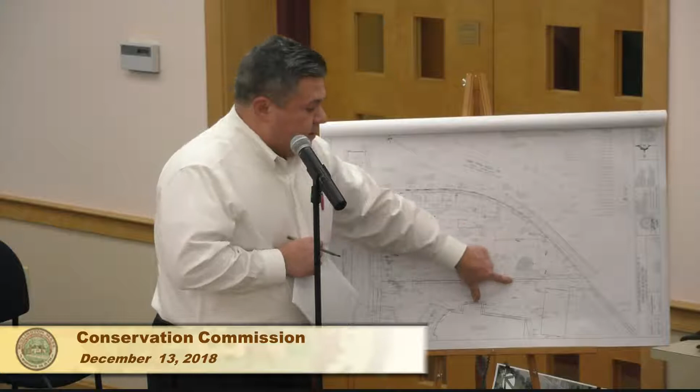I understand you were able to visit the site yesterday, and I'm sure you saw all the cars on the property. One change to the plan that we noted during our survey is that there used to be a building where I've drawn the orange square, and now it's a gravel area. It was thought at the time that they could continue to use that building, but I guess for whatever reason, the way it was explained to me, they couldn't use it for its intended purpose, so it was taken down and it remains a gravel pad.

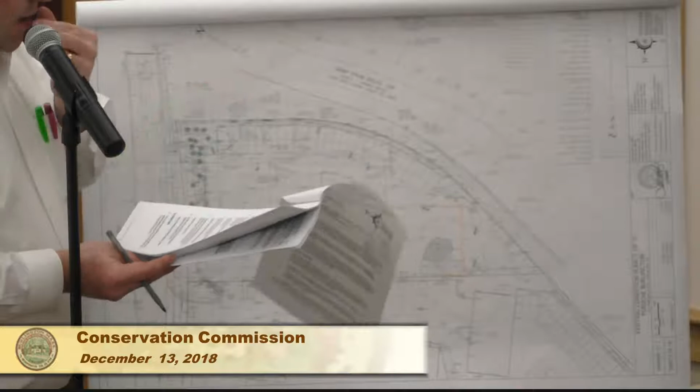In addition, we went through every item, every condition in the permit, and spoke to each one. So our letter is rather long because we went through every single condition. For the most part, everything went right along, but I want to bring your attention to a few pages - let me count them: 2, 3, 4, 5, on page 6.

Special condition number 45. During construction, there was an oil water separator and stone cuttings collection pit that they encountered as they were dismantling the former building. It was thought best to have the LSP of record out to the site to make sure there were no reportable concentrations of any contaminants. Those areas were tested, and a report summarizing the work was prepared and submitted to Christine Mathis at the Board of Health back in 2015. But none of this activity occurred within the jurisdiction of the commission. The important thing is that no contaminants were found as they removed these objects. It was just a bit of a surprise, so I wanted to point that out to the commission as we went through our review.

The next part of the special conditions I wanted to draw your attention to is right at the very end, where there's an extensive discussion in the order of conditions - this is special condition number 57 - that talks about no certificate of compliance being issued until the following items are submitted: the written narrative, the as-built plans, and an operation and maintenance compliance statement.

One of the last paragraphs in our letter, I'm just going to read aloud here. This letter, the one we prepared that accompanies the COC, is our written narrative providing compliance with condition number 57. As-built plans prepared under the direction of a professional land surveyor and professional engineer accompany this request. The owner has indicated to us that the parking lots on 62 and 64 Cambridge Street are swept with a street sweeping machine each spring - I'll follow up on that in a minute. They have also indicated catch basins have not been cleaned because of the regular street sweeping program. The responsible party for ongoing operation and maintenance of the stormwater structures on 62 and 64 Cambridge Street is Herb Chambers Companies. We also attached a couple of aerial photographs that date back to prior construction and post-construction.

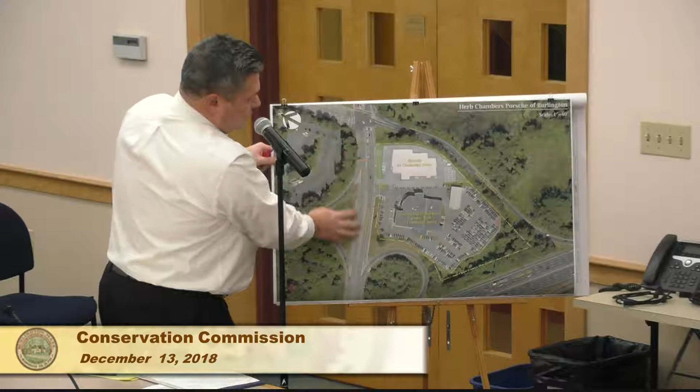I'll zoom in a little bit and drop this down on the floor in a minute. But back up a little - I'm sure you're all familiar with the location of the site here. North is this way on the plan. Here's Burlington Mall Road, and over to the west is Cambridge Street, Route 3A, and this is the ramp that comes down from 128 at the Mall Road access.

64 Cambridge Street is about 1.5 acres of land, and as you know, it contains quite a bit of impervious surface in the existing condition, mostly paved. The reason we're here is because we have some minor activity in the buffer zone to a bordering vegetative wetland.

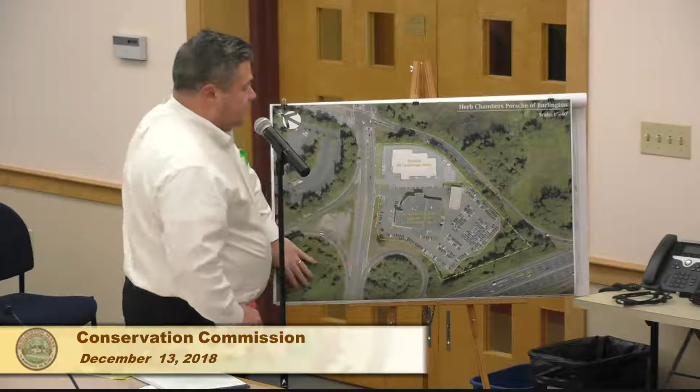There are a couple of wetland resource areas that we reflagged - the same ones identified on the previous filing for the car storage facility. To the north, on the other side of the ramp, is the primary BVW, part of a larger system. This property happens to be tucked away in the northwest corner of a Zone A to a public water supply in the town of Woburn.

This wetland, even though it's a wetland, is very high in the watershed. Eventually these waters flow through 64 and 62, along Cambridge Street - I chased it down to give you folks an idea of where this goes. It eventually enters Little Brook, then Cummings Brook, and eventually into Woburn, into Horn Pond. That's about 2 miles away from us.

The buffer zone from the bordering vegetative wetland comes onto the site into the parking lot area a little bit, so our closest activity is about 85 feet from that BVW. Across the street on Cambridge Street there's also a small BVW, but its buffer zone falls just short of the property, so there's no activity within 100 feet of the wetland from across the street.

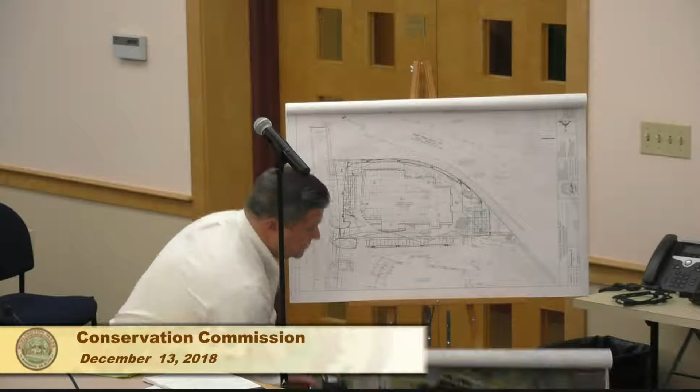Generally, I'll describe some of the basic elements of the project. In terms of impervious surfaces, about 83% of the property is paved today. What we're proposing is taking up that paved surface and replacing it with another impervious surface, but it'll be roof area - a reduction of about 13,600 square feet of pavement, something to keep in mind as we go through the plan.

Overall, it's actually a 13,600 square foot reduction in pavement, but overall we have an increase in impervious surface of about 11,400 square feet - a lot more roof area than pavement. Even though this is being redeveloped, we're not asking for redevelopment credit. When I get into the stormwater management standards discussion, we're considering this new construction, full compliance with DEP stormwater management standards.

Where is most of that increase in impervious coming from - is that from the gravel section being paved? Otherwise it's all just roof and pavement. We were conservative in those representations - I did break that out as well. That gravel area, for example, is just over 8,000 square feet, so it's just about a 3,200 square foot increase in hardscape, but we included that gravel area as impervious because if you recall, in the previous plan it had a building on it back at that time. There's also another curb cut and stuff, which is additional impervious.

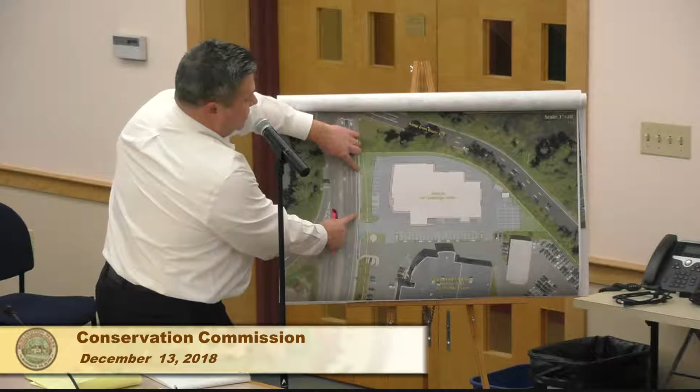You may recall that in the existing condition, prior to the car storage facility, this had another commercial/industrial use with 2 curb cuts onto Cambridge Street, and they made us close both of them because this parking lot was going to work in concert with the dealership, as it does today. At the time, the owner reserved the right to come back to the town and reopen a curb cut in the future if that property was going to be a standalone property. So here we are today, and our proposal is to reopen this curb cut onto Cambridge Street at this location.

In terms of general flow, we have two-way traffic around the entire building, and you can see how the parking is laid out on the project.

This building, in addition to having a large floor area for customers, also has a lower level garage space for inventory vehicles, with space for 85 inventory vehicles. I'll go into a little bit about where the groundwater is in relationship to those floors in just a minute.

For the remainder of my presentation, we're going to be referring to the topographic plan and our utility plan that has most of the drainage information. This is our topographic plan of the property. Just to give you an idea, in the existing condition, which you saw for yourselves out there yesterday, the site has a slope to it.

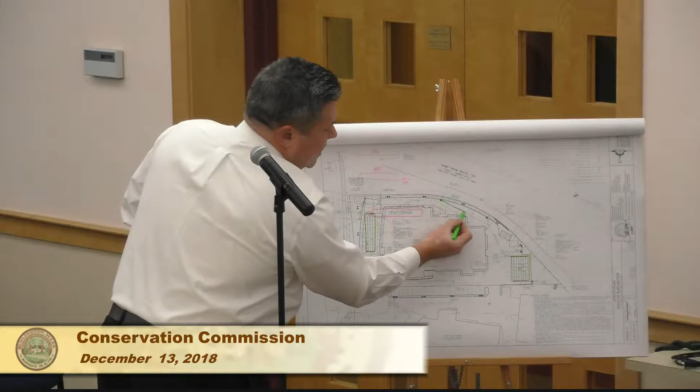So the way the stormwater system works, it's not quite split in half, but let me use two different colors to show you that for our infiltration area number 2, we have deep sump catch basins that collect surface water runoff from this portion of the site, heading back in this direction. They connect to a drain manhole and then to our sediment separation device, which we're going to be reusing, and then to another discharge manhole before entering the subsurface chambers.

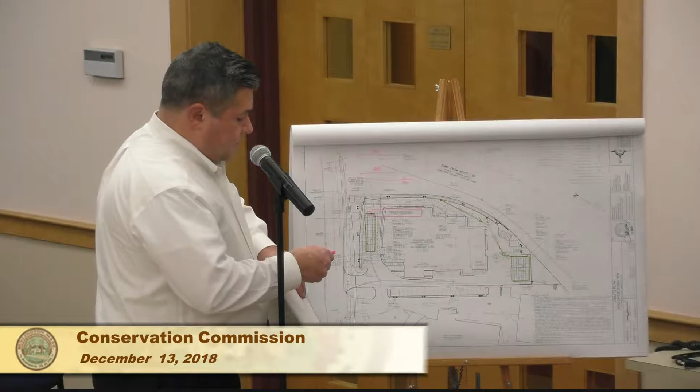What I didn't tell the ConCom is that we just had our hearing number 3 with the planning board on this project last week, and leading up to that meeting, after we had already filed with the Conservation Commission, there were some minor revisions to our landscaping primarily. After we met with John and Eileen, John made a recommendation to us regarding how we're connecting our roof runoff to the infiltration system.

We had designed the system, and we go back—we work in a lot of different towns, and there are some towns and some reviewing engineers that like us to run our roof runoff through the sediment separation device, and some folks that just say run it directly to the infiltration device because it's considered clean.

Right, so good, we separated it, and a portion of the roof, if you will, comes out here and enters that final manhole after the separation device now. You haven't seen that small change yet, but we'll be sure to submit the revised plans.

On the other side of the site, we have our infiltration area number 1. Again, we have a series of deep sump catch basins that run to a series of manholes. There's a small trench drain here to make sure we're capturing the water coming off in this direction. It's a very similar setup, a series of drain manholes leading to the separation device, then to the final manhole, and then the rest of the roof discharging to the manhole and then to the infiltration device.

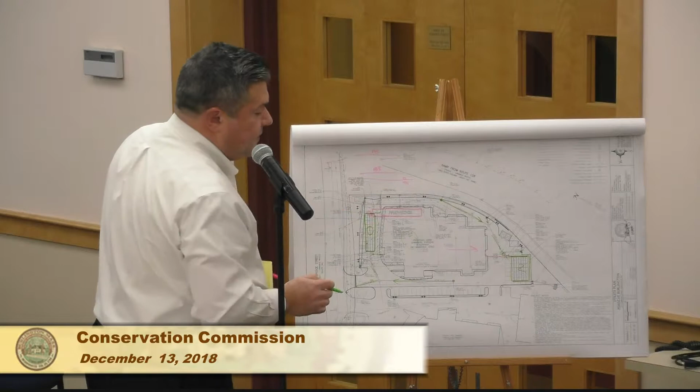So we have an overflow structure that comes out of this infiltration area, number 1, through the retaining wall. And then for the other one across the site, we're proposing a level spreader in the back here to control any water that were to come out of that device.

I'll go into how we were able to mitigate both volume and peak flow in a minute, but going through the standards, we have no new outfalls without control. That one is a new outfall, but we're controlling it with a level spreader, and we've designed the size of the riprap based on the velocity of the water coming out in the design storms appropriate for sizing that riprap.

In terms of peak runoff, if you look at our summary tables in the beginning of our stormwater report, we have slight reductions. We try to get it as close to net change zero as we can for each of the design storms. We were also able to mitigate the volume as well through the use of our two infiltration chambers, all the way through the 100-year storm event.

For groundwater recharge, our test hole program determined that we have sandy loams, which is hydrologic soil group B, which is— Excuse me, did you just say you're mitigating volume in addition to peak? You're mitigating the volume in addition to the peak flow? That's correct.

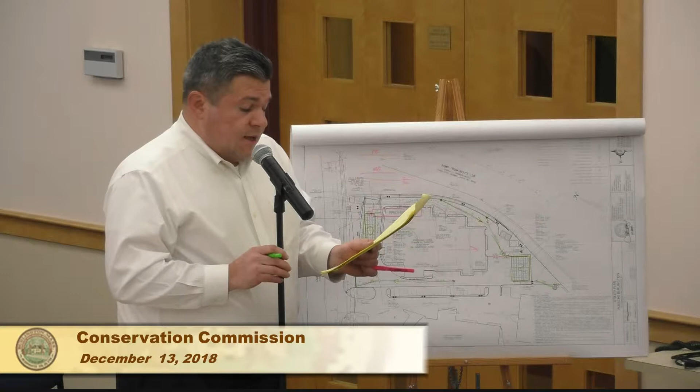For treatment, with the use of the deep sump catch basins and the sediment trap removal device, we're able to achieve close to 80% removal even before we get to the infiltration basins, which is a little bit more than what we would normally do. We decided to reuse those devices since they're on site, so we have a little bit of additional treatment there.

Standard number 5 is the land use with higher potential pollutant load, which we use the acronym LUHPPL for. This is not a LUHPPL. Standard number 6, critical areas. We do have a critical area in this case with the zone 2, which requires additional infiltration volume.

Standard number 7 was the redevelopment standard, but we're not asking for any credit as a redevelopment project. Number 8 has to do with operation and maintenance and construction period pollution prevention. Because we're going to be disturbing more than an acre, what we'd like to do in our stormwater reports is actually prepare the stormwater pollution prevention plan that will be pulled out and attached to the EPA notice of intent later.

So that it's all prepared at the time we do our stormwater report. Standard number 9, long-term O&M. We have a detailed operation and maintenance plan for the project, and hopefully it'll be adhered to going forward. And then finally, as with any project, we have to make a statement that we promise not to have any illicit discharges into the stormwater treatment system. So we do that in our stormwater report as well.

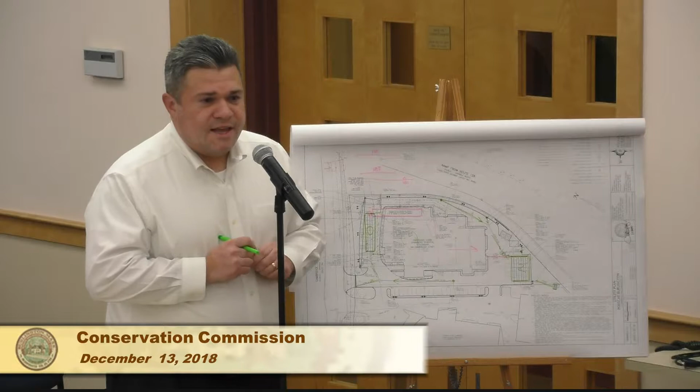Thank you. Okay, so rather than have you—you said you could do what? I could go into the landscaping plan if you wanted to find out. I would suggest we hold off on that. Only because I'd like to give the commission an opportunity to ask questions and hear any preliminary comments from staff at this point. So, John, any reaction to what you've heard so far, or review?

So this is essentially an erosion and sedimentation control hearing. I mean, it's a notice of intent, but the buffer zone barely intrudes on the property, so you're really reviewing this almost as if it's not a wetland filing, it's an erosion and sedimentation control filing. Stormwater is the primary concern. It's a really fairly straightforward site. There's a collection system into proprietary structures, that connect into the infiltration structures.

So it's pretty straightforward. They're proposing to, certainly their pre-treatment far exceeds the requirement. In a zone 2, in a critical area, you have to remove 44% of the TSS prior to infiltration. And although their numbers are probably exaggerated, they're saying 80%, which is far more than they would need to remove. The peak rates are essentially unchanged from existing conditions, very slightly reduced, but overall it's a fairly straightforward project.